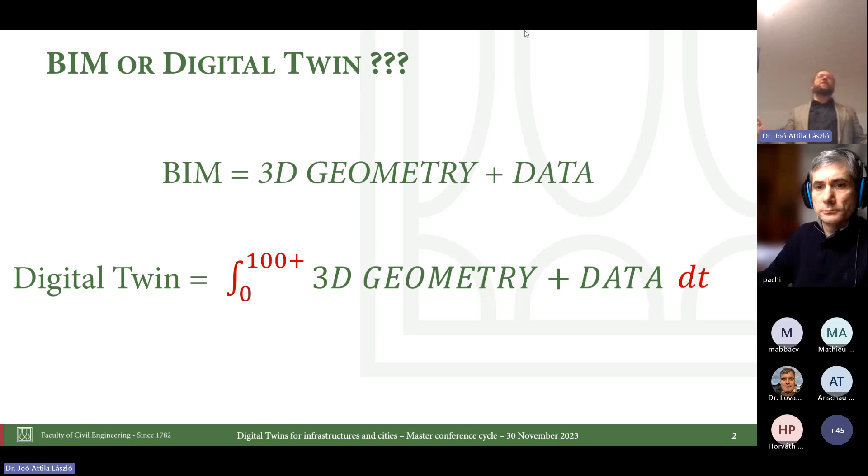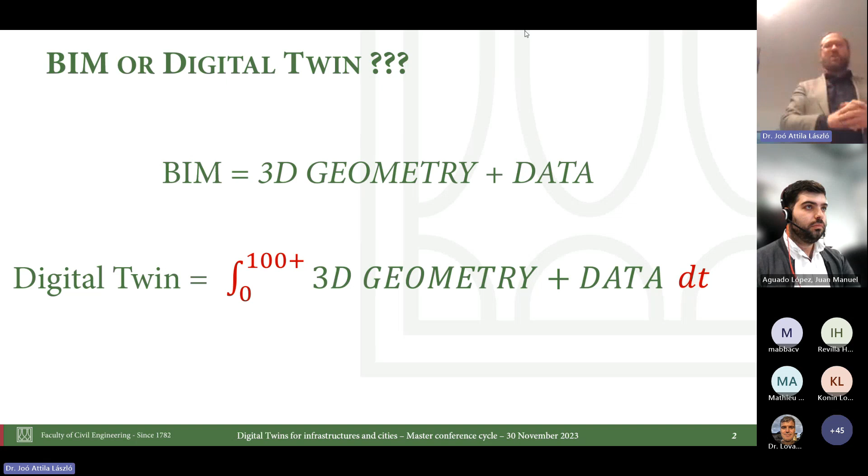There can be several differences. Let's say three. The first one, this digital twin depends on time, right? So we want to store and use any kind of information which corresponds to the structure from the design table to the end of the life cycle. And that's why I made this integration mark and 100 years, because we design bridges for 100 years.

And of course, there are two other specialties. Let's say what kind of geometry we have. It can be different from what was on the design table, because during the erection of a bridge, of a structure, we may change something in the geometry. So what we need is the final geometry, definitely the final one, and what kind of data. And from my point of view, this is basically the most important thing, the most important difference.

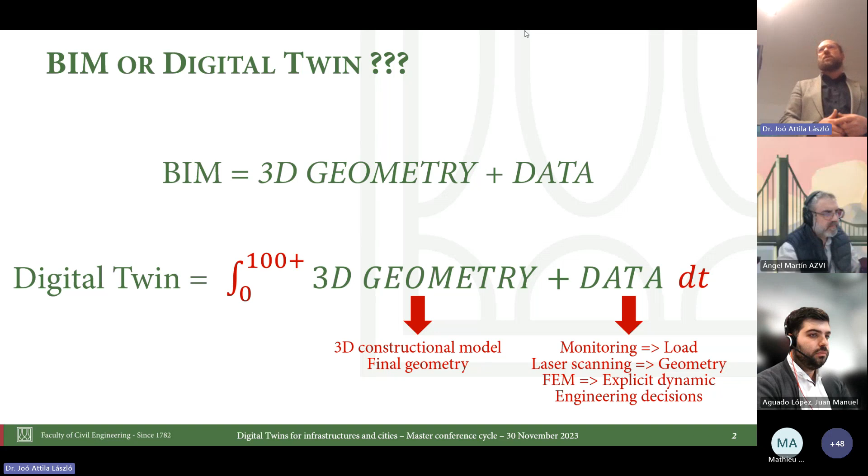The BIM model is a model for just one point in time. Of course, maybe you can take into account the scheduling of the erection and so on. But now I would like to store any kind of structural data. And that would be my message at the end, that we can store in the BIM model some other structural monitoring data. We can store the scanned geometry, and I will show you that we can do special explicit dynamic analysis, and we can use that information later as well.

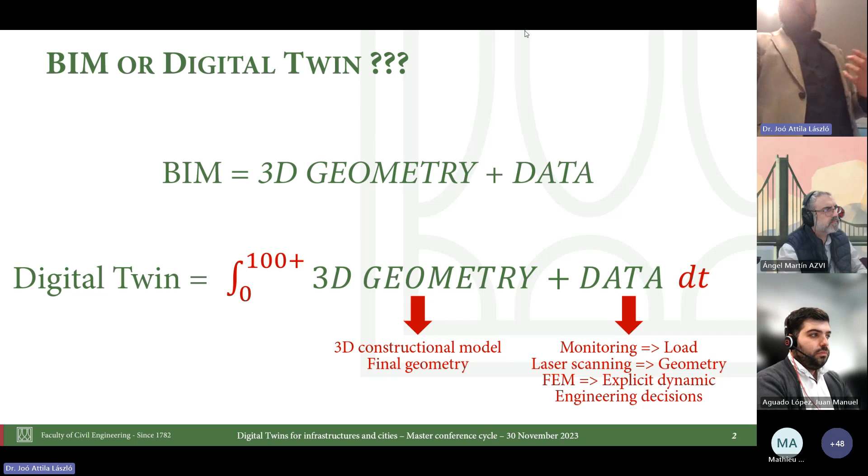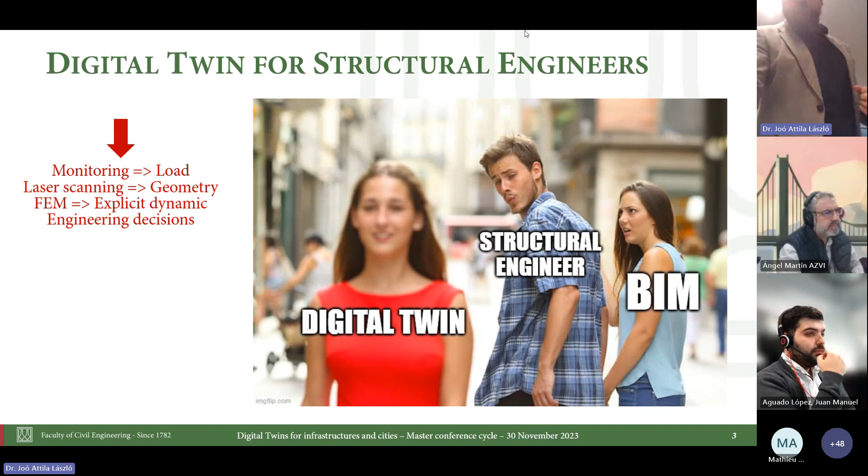So I think that the future for structural engineers is the digital twin. We can have much more engineering information than just the geometry and just the fabrication information. Of course, BIM is part of this digital twin, but I will show you how we can extend it with some information.

So the basic idea can be seen on this slide, that we need the 3D geometry, the 3D model, and it can be several kinds of 3D geometry, because we can have a finite element model, constructional model, and so on. And that will be the base geometry. And we can store any other data we need. And it can be some strain gauges, even temperature, wind speed on a structure, on a bridge, and so on. And we can have a finite element simulation. I show ANSYS, and what I will show during the presentation, all of them are ANSYS simulations. So we can store all kinds of structural information.

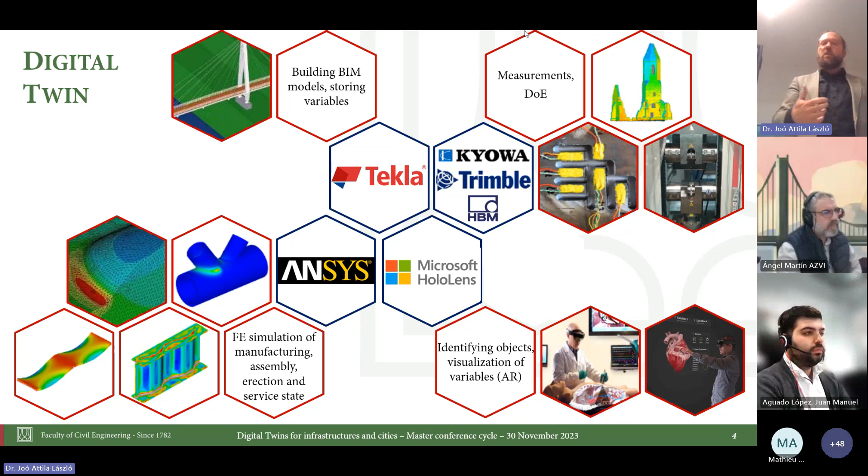And the last part will be how can we share this, and how can we make it easy to see large data, because we have much more data, and we will have much more data than we used to. So if I see the life cycle of a bridge, and the example will be a bridge here, we have different steps until the end of the life of the structure. It starts on a design table, and we can manufacture the thing.

May I ask you to turn on the microphone, please? Just 1 second.

Okay, thank you. So the design table, manufacturing, the assembly erection phase. We used to have in Hungary, I'm sure it's not all countries, proof testing of a bridge, but we have to do it here. And of course, the whole life cycle of the bridge. The basic idea: we will have some real measurements on the bridge, mainly strain gauges, which is most important for us from a structural point of view. We will have finite element models for the different levels.

We collect all that information, because usually we use different software. We use different software for the design, maybe for different finite element models, depending if it's a global model or a local model, for making drawings during the manufacturing process as well, and even during the life cycle. Maybe we have monitoring software as well. So we try to make this idea that we just have one model of the bridge, which will be now a Tekla BIM model, which is the real geometry after the erection. And we try to store and extend somehow the functionality of Tekla Structures.

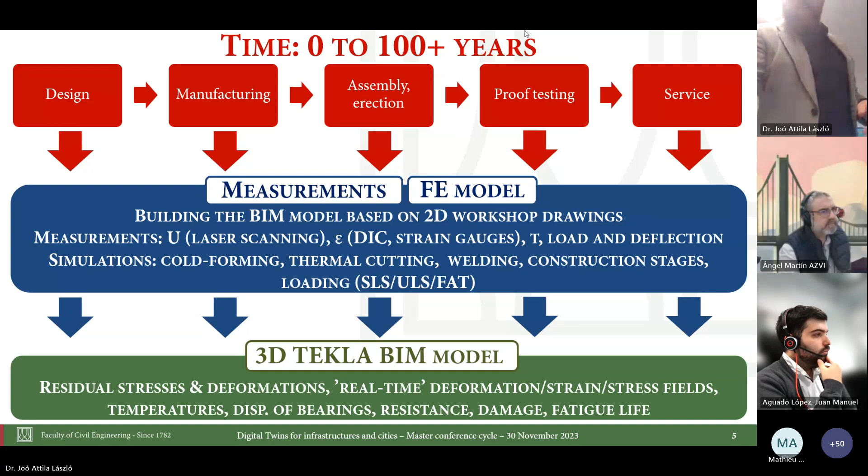So why? I think the construction industry is going through a large, very effective change, compared to, let's say, the car industry or mechanical engineering industry, where I'm sure you know about Industry 4.0. Now we can say that in the construction industry, we are in the stage of Construction 4.0. So we try to use digital technologies all around the different phases of the design, erection, and through the life cycle of a structure. And this information and digital twins can be used in plenty of places. For example, for a bridge, usually we have a maintenance cost, we can have an extreme load. But if we know the real behavior in real time, maybe we can make safer structures, and we can reduce the maintenance cost as well.

And as you heard in the introduction, I'm the head of the Innovation Management and Cooperation Centers. So I try to think on the business development side as well. As we have seen on the previous slide, nowadays we usually have a company for design, a company for the manufacturing, one company for the erection, and somebody will take care of the bridge in its whole life. So they are different companies, and the information flow is not so easy between them. So in my point of view, these innovation technologies, and especially the digital twin, can be a new business opportunity. That's why this name here as well.

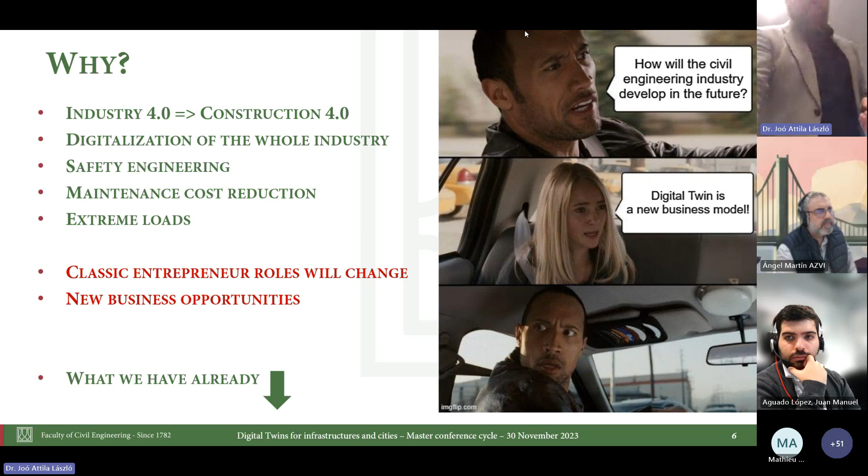So what we have now, I don't want to go into details, but as I mentioned, we have different software, we have different companies, even in the university. I will show you just some examples for these different phases. For example, the design phase.

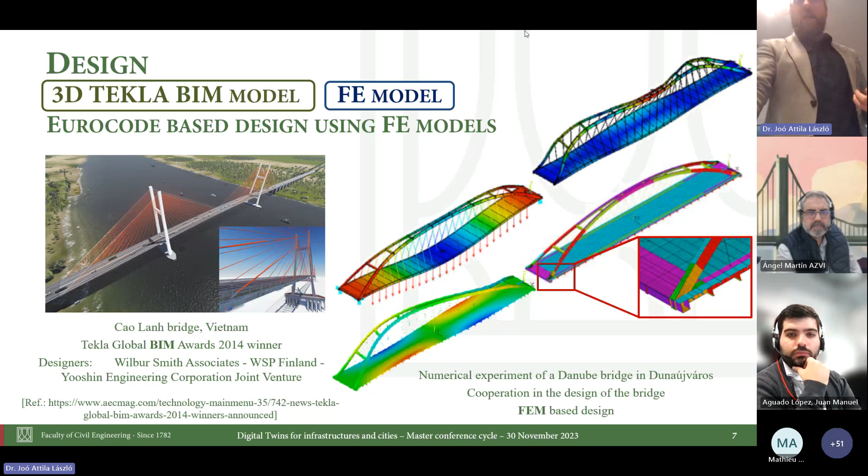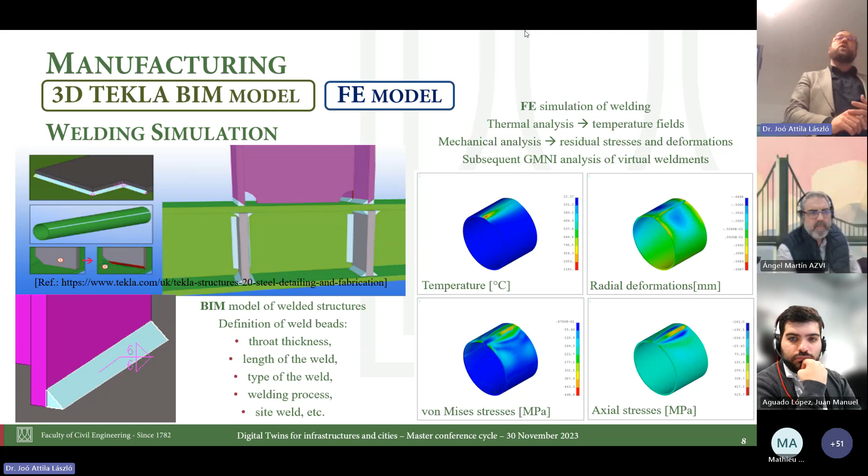Again, I don't want to go into details, but we are using 3D models, maybe a BIM model as well. We are using some kind of finite element models as well for the manufacturing. We can do welding simulation. You can see a video on the right side of the 4 videos here, a very simple welding simulation. So we can get any kind of information from those simulations.

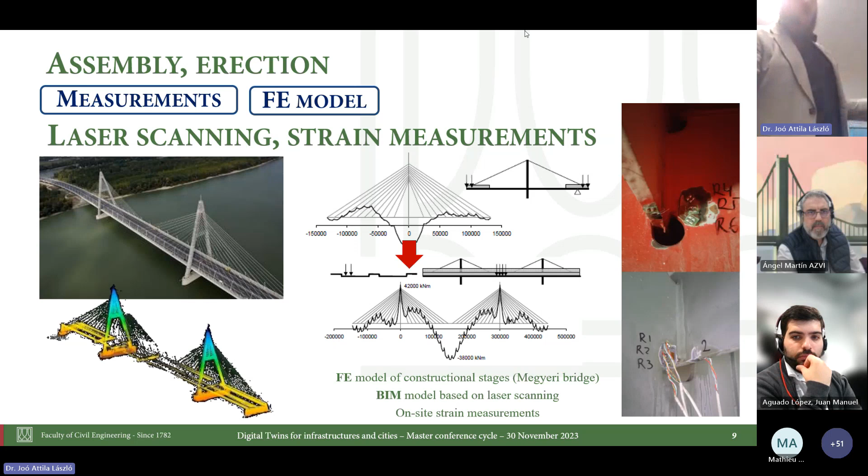During the assembly and erection phases, we can use geometry measurement tools, laser scanning, or we can monitor the behavior of the bridge as well, which is a usual thing, and we used to do it here in Hungary and Budapest as well. We have nice bridges around Budapest.

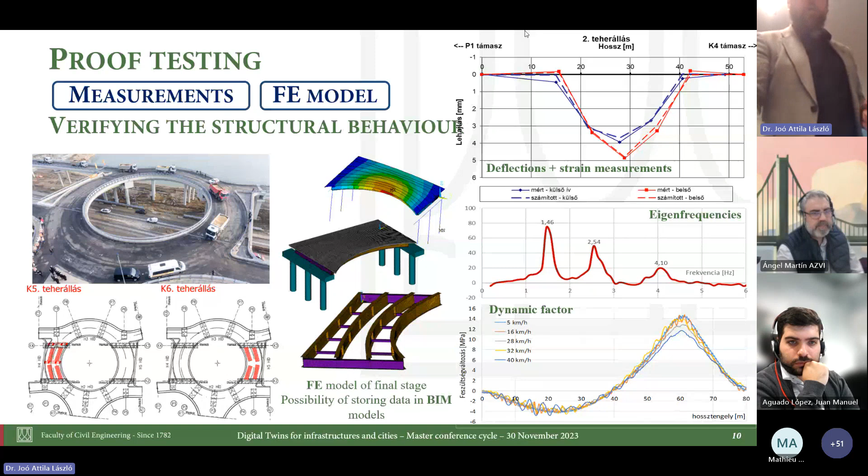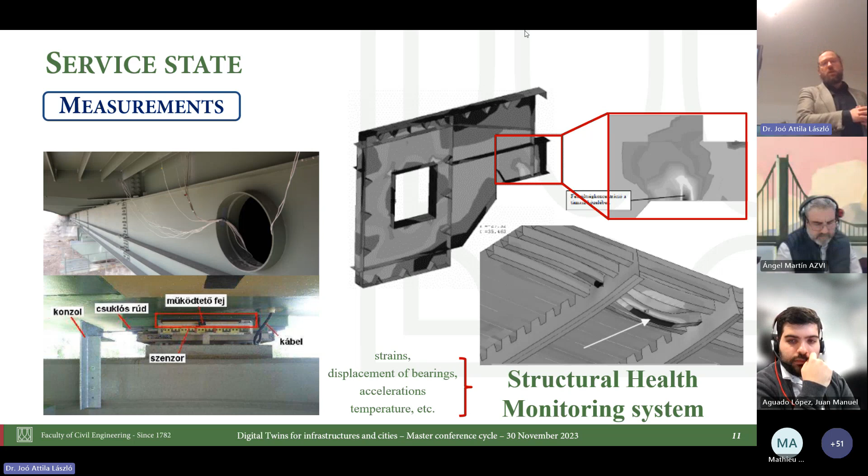It can be one way to try to follow the real behavior of the bridge, but we want to improve that, and that's the digital twin, I think, and we will go further based on that. So as I mentioned, we have all these things actually, but the digital twin can be the one technology which connects each step from the design until the whole life cycle of the bridge.

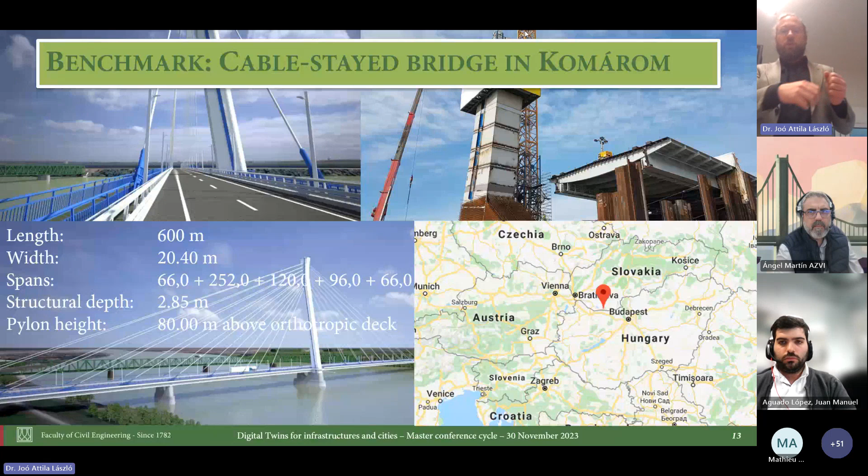So in the last 4 years, we had the chance to have a project, and we were able to follow these steps. Actually, from the very beginning, we had the design data, the design drawings, we had the calculations for designing the bridge, and we were able to follow it until the end of the erection and during the service state as well. So based on the same steps, I would like to show you now the new results we have.

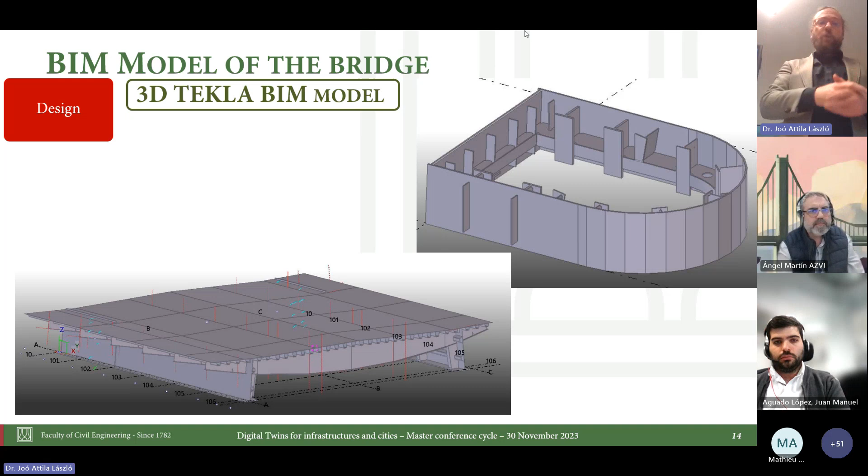And as I mentioned, we should have the final geometry of the bridge. Now it's a Tekla Structures, a 3-dimensional constructional model. Every plate and every weld can be found in the model. Of course, several finite element models were used during the design.

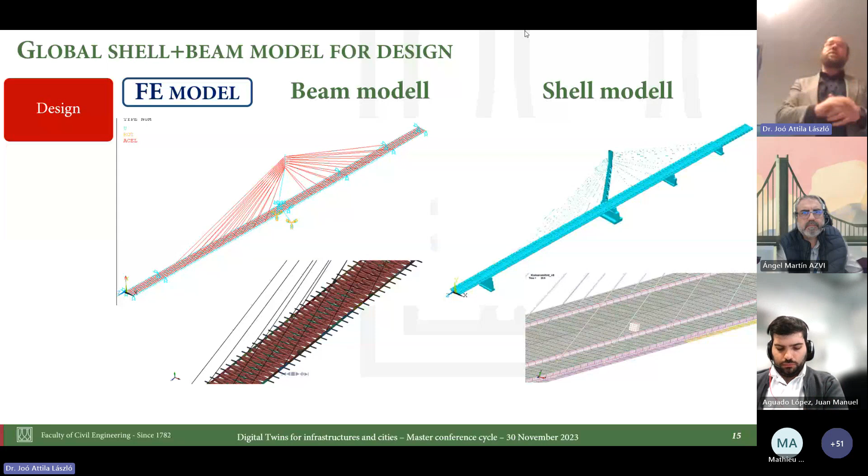It can be a simple beam model with beam elements on the left side; on the right side, maybe a complex shell and beam element model as well, where the deck plate is usually made of shell finite elements, maybe the pylon as well, and maybe the cables are link or beam elements. These models were used for the design, but they can be used later with slight changes. I will explain it later during the presentation.

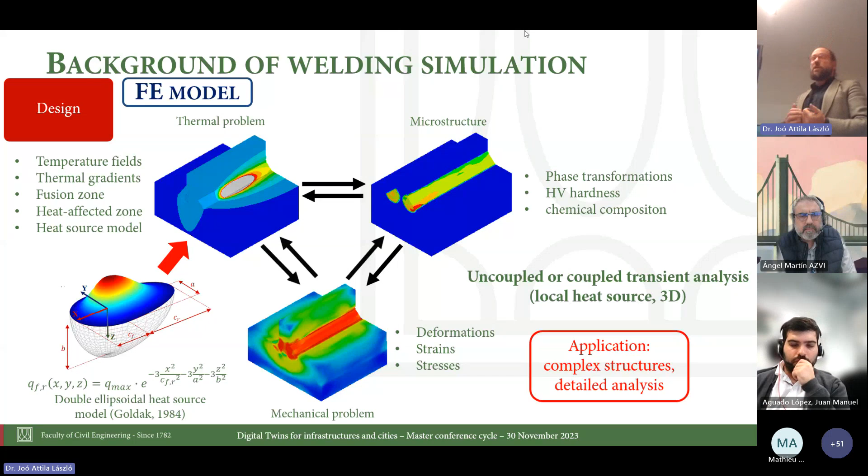We had the chance to be part of the manufacturing steps. So I just want to show you some details of the welding simulation, because we did some measurements on site, but for the welding preparation, defining the welding steps and choosing the correct methodology for welding such a large structure, the welding simulation can be very useful. It can be a complex analysis. It's a thermodynamic analysis where you can see the heat flow, and then we can do a mechanical analysis, and we can define the deformations, the strains, and the residual stresses as well.

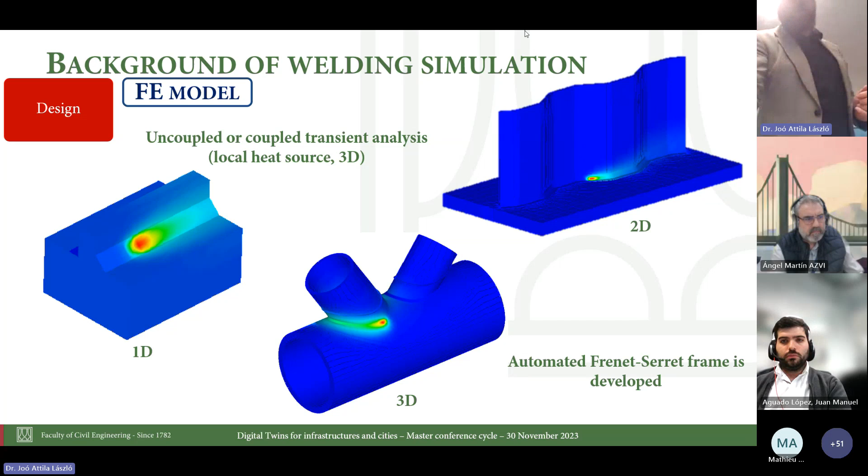I'll just show you some examples. How can we do it with volume finite elements, and even during the project, we developed a simplified welding simulation as well, because sometimes it can be very time-consuming and computationally expensive to do this kind of simulation. But we can do it, and as I mentioned, we were able to measure during the fabrication process as well.

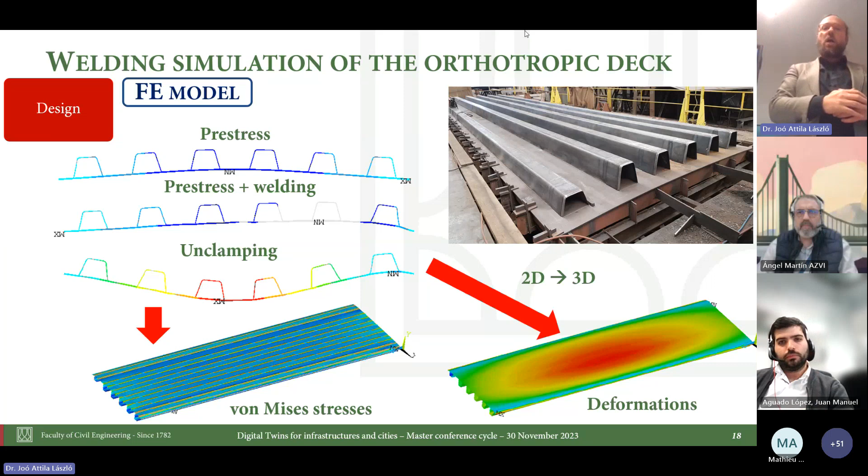And as I mentioned, for the digital twin and the real-time digital twin, it can be a huge step that we know all the information from the fabrication. So not just only the time when the erection is finished and we start the life cycle of the bridge, but from the manufacturing process as well. So let's go to the next phase, the manufacturing.

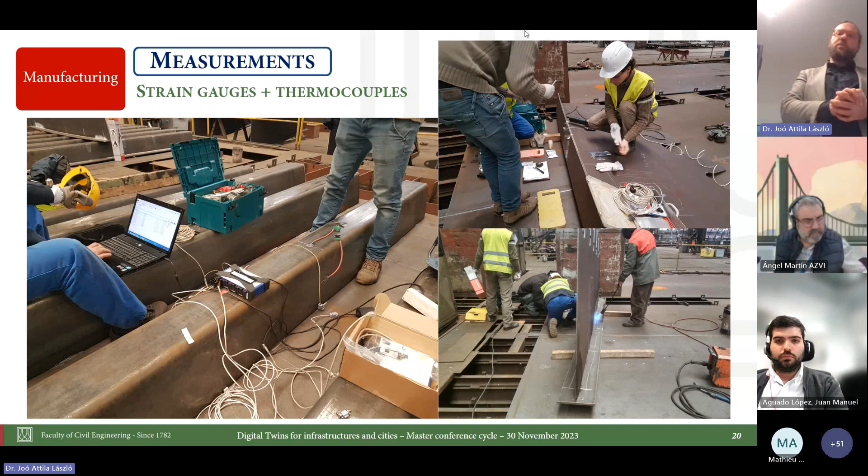On one you can see how we measure the strains on this orthotropic deck. And I have tons of pictures and reports as well. We measure different parts of the bridge as well. You can see a cross girder on the bottom right side as well. So we did plenty of strain and residual stress measurement as well.

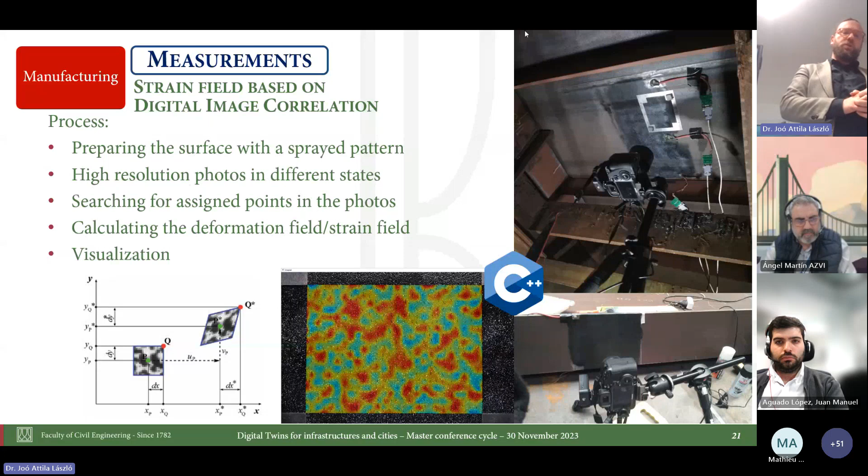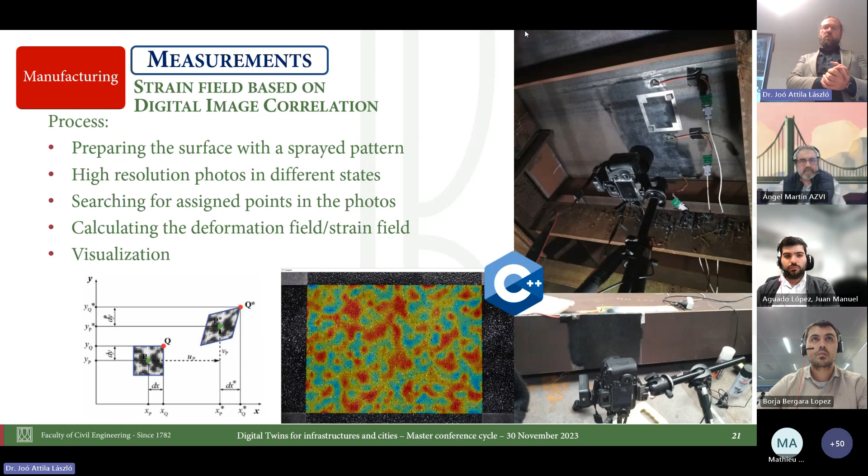We also tried a new technology which is in the research phase right now. We try to measure the strains with a high resolution camera. We paint the steel structures with very small dots, and based on the movement of those dots, we can measure the strains with a very high definition camera, and it's a very useful technology as well.

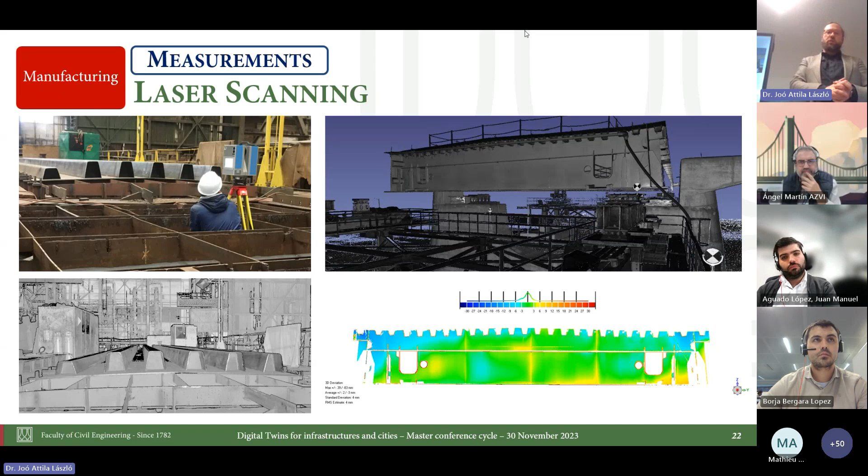And as I mentioned, we not just measure the stresses by strain gauges, but we scanned the geometry as well. You can see in the manufacturing hall how we measure the orthotropic deck and other parts. And these results can be used later, because we can have a deviation map. So we can calculate the difference from the geometry we have in Tekla Structures.

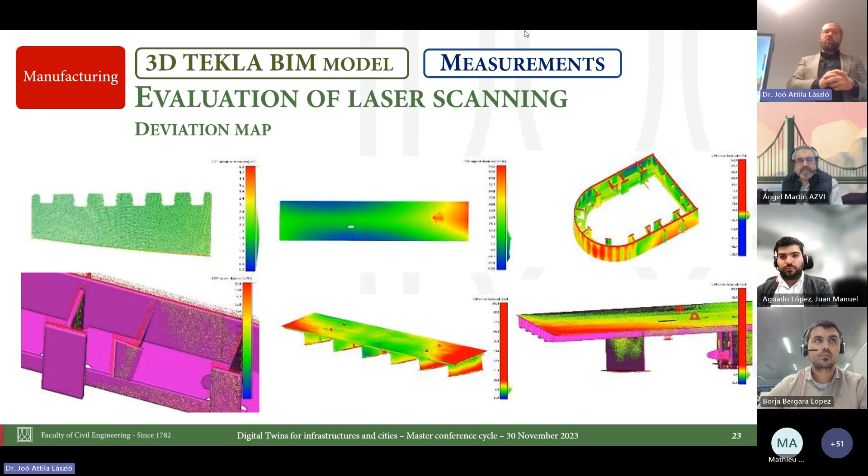We have the exact geometry we would like to achieve, and we can scan every point, every millimeter or so, of the geometry, which gives us much more information than we used to have, because usually in the classic technology, for example for the deck plate, you just measure the corners, the edges, the cross girder main points. So you used to have several points of information, but with this kind of technology, which is close to the 3D technology that we want to use in the digital twin, we can have much more valuable information. We can do this, of course, during the assembly and the erection phases as well.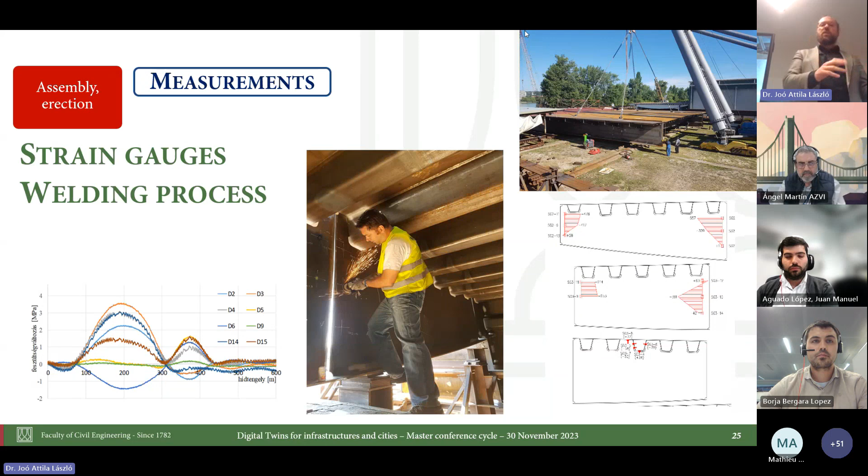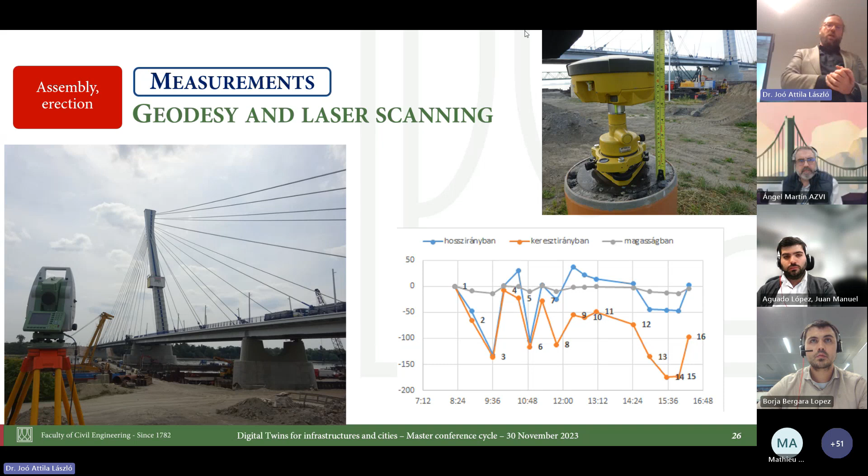For this bridge, there were smaller assemblies prepared in different countries, Slovakia, Czech Republic, and Poland as well. And some of them, the deck plate parts, came to Hungary, and there was a pre-assembly phase here in Budapest, and then the whole deck plate went to the site. Because we have some extra welding during this pre-assembly phase and during the erection phase, we can define the residual stresses as well. And of course, we can measure the geometry with the same technology as we used in the industrial hall. We can do it inside as well to check the geometry of the bridge.

So we are going closer to the service state, but before the service, we have to do the proof testing. You can see a picture of this site testing on the top right corner. The vehicles, of course, are loaded, and we calculate the deformation by our own finite element model, the geometry and the deflection of the bridge, and we do measurement as well with geodesic technology.

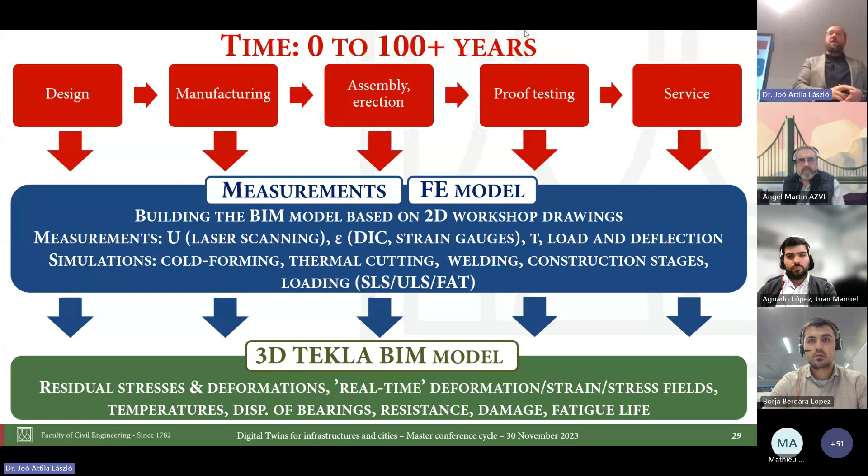And on the bottom right graph, you can see two sides of the bridge in two lanes we measured, and you can see a very good agreement. Actually, there are two red lines and two blue lines, right? They are so close to each other that there is no problem with the bridge. So we measured what was the calculated shape of the bridge. And now I think we are coming to the most interesting part.

And as I mentioned, based on the sensor data, there is an independent research field about structural health monitoring. If you want to use SHM, then you want to decide the behavior of the bridge based on several data. Of course, you have to install a monitoring system, but I think the main problem with this kind of SHM technology is you will have information just from specific points of the structure. So you won't see the whole picture.

I think that's why the real-time digital twin can be much more important for structural engineers. Because as soon as we have a monitoring system, maybe if we place the strain gauges in a special way, I'll show you on the next slide, then we will be able to define the load. And actually, if we want to calculate the real behavior of the bridge, we have to know what's the load, the vehicle axle load which is going through the bridge. So I will show you how we can calculate it, how we can define the load which is going through every day, every minute on the bridge.

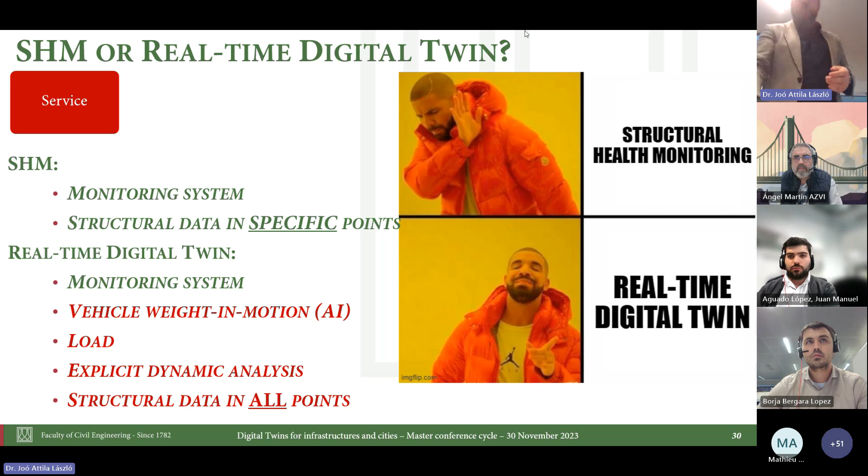After that, as soon as we have this information, we can do an explicit dynamic, real-time dynamic analysis. We just have to know what's the exact load there. And as soon as we have this simulation, we will know all the structural data we need in all points of the structure, not just those nodes where I have sensors, strain gauges, accelerometers and so on, but in all the nodes of the structure. So that's why I say the real-time digital twin can be much more useful for structural engineers.

Because as I started for the real-time digital twin, I would like to have just one 3D model, and I would like to store all kinds of information, like explicit dynamic analysis information, in that 3D BIM model as well. So we have to export that data, and that will be the output of this explicit dynamic analysis, and we will use Tekla to show that information as well.

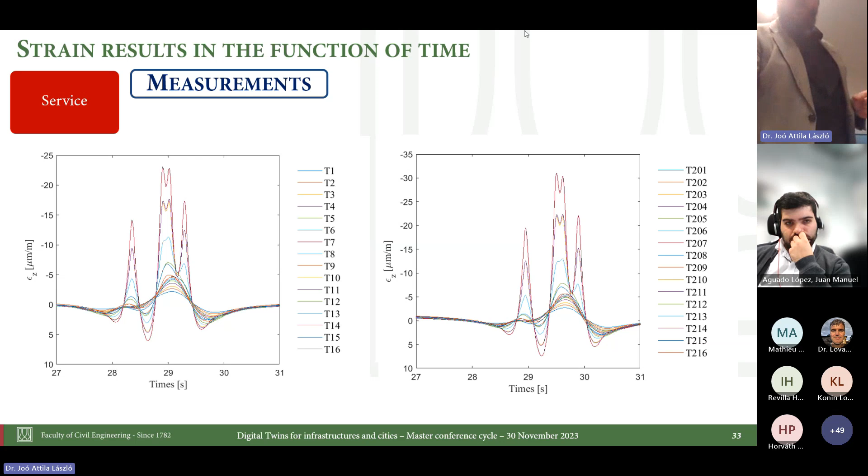We have to define this kind of stress concentration. You can see there stress changes during the time. Of course, we have to eliminate the noise. Based on the two sections, we are able to define the speed, the number of axles, the sum weight, the total weight of the vehicle, and after that we will have the axle weight.

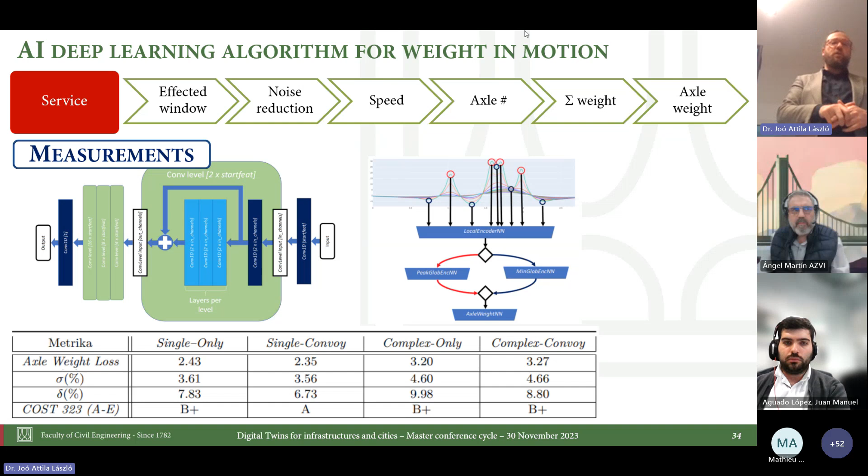As I mentioned, we have the big data here. There's no exact solution, but a deep learning algorithm can be used, and it's a very effective way. Because the system, I think it's kind of cheap compared to other structures, but we have much more additional value in it, because we have to develop this artificial intelligence, and we can say the accuracy is much better than what's available nowadays. So who is afraid of the AI? Based on this, actually myself, we can use it in plenty of ways.

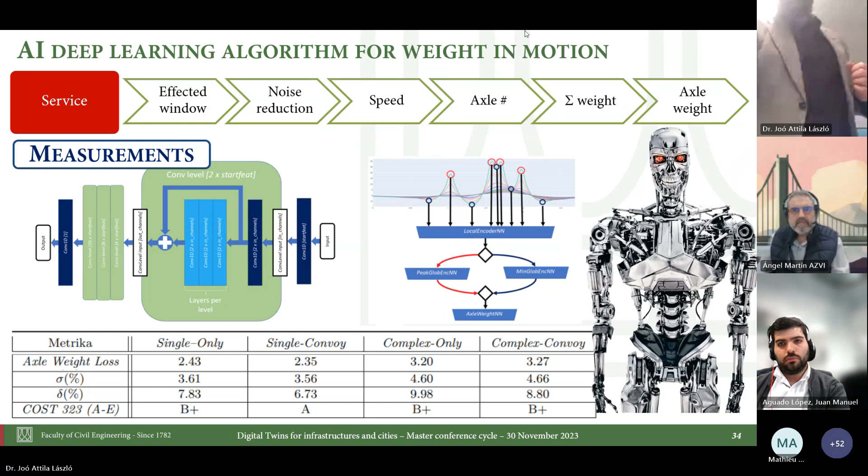And in the structural engineering industry and construction industry, this can also be a very useful thing in some cases.

As soon as we calculated and defined the axle loads going through the bridge, we can run an explicit dynamic analysis. You'll see a video showing slight changes in the displacement.

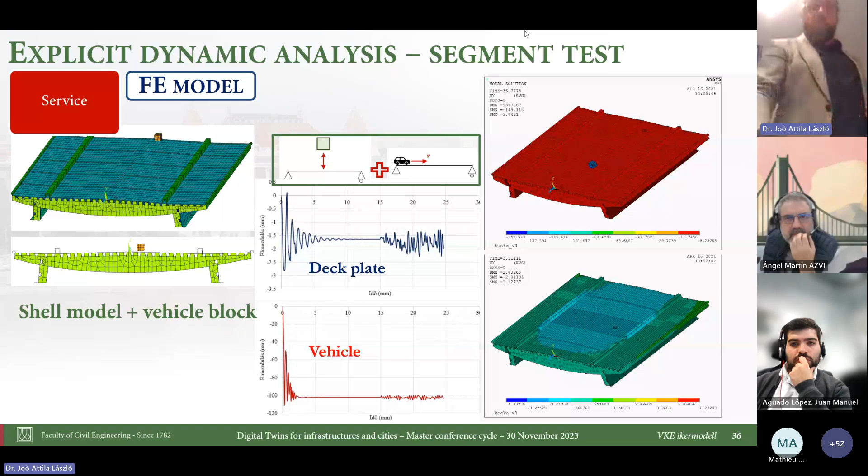We made some tests on small deck plate elements, looking at how we place the vehicle and the interaction between them. You can see the time-dependent displacement of the deck plate and the vehicle. It's a real dynamic system - the vehicle goes through and changes the stress fields in the deck plate. Of course, we can do this for the whole bridge as well.

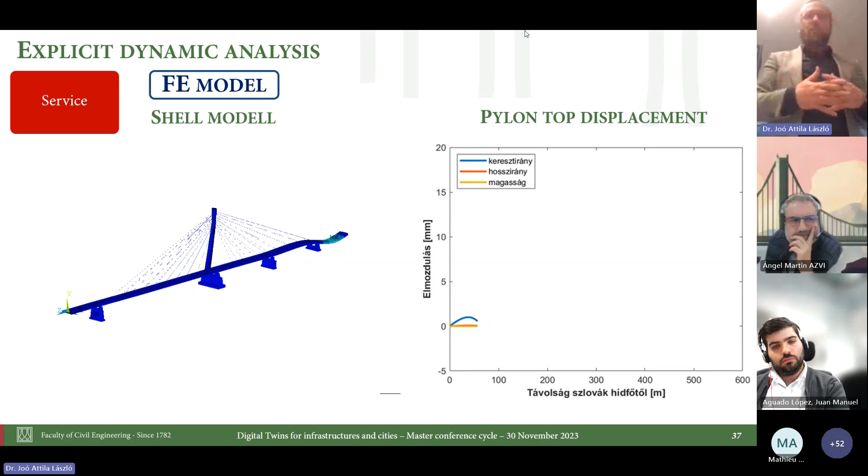We had some results on the shell model, and now we are developing a beam model, which will be less time consuming to run this kind of explicit dynamic analysis, while still being able to calculate all kinds of structural information based on it.

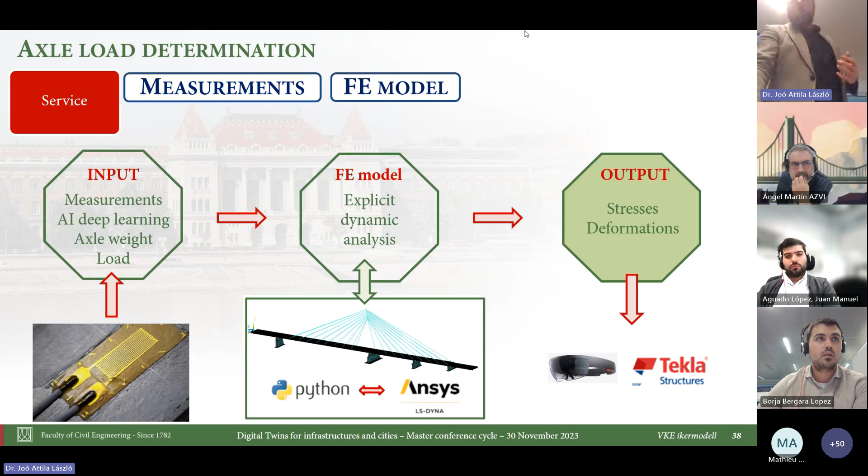At the end, if we have this data, we have to show it somehow. As I mentioned, BIM structural software is prepared to handle manufacturing information, drawings, lists, and so on. So we have to develop our own application which can store this kind of data - sensor data, laser scan geometry, or finite element simulation - and all of this depends on time as well. So you can see what kind of data we can have.

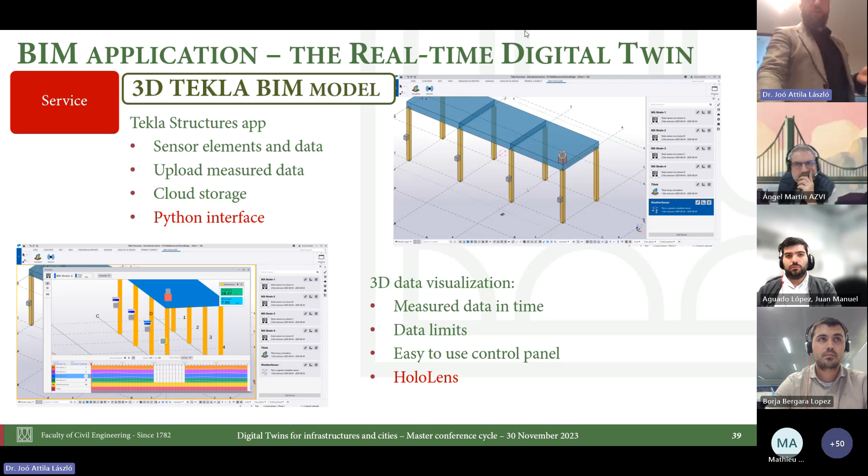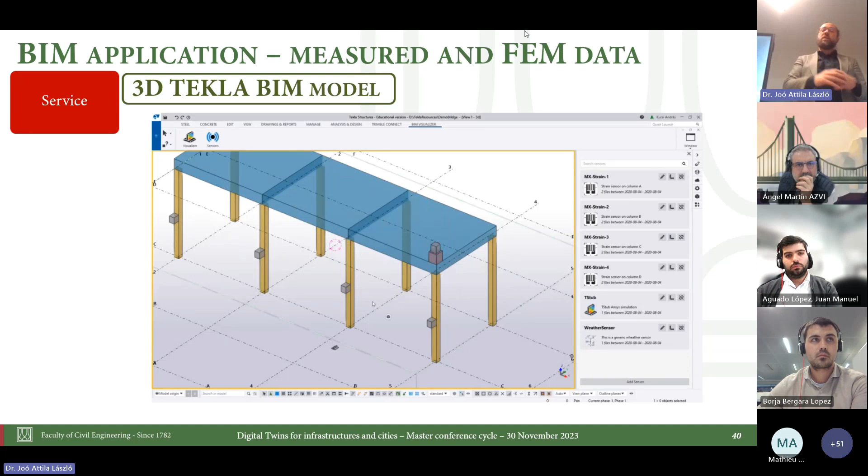I'll go to the next slide because I have a video I want to show. It works actually in the Tekla app. This is a simple structural example. We can have objects, define them as sensors, and store the sensor data. Of course, we can use timestamp data for these and show the results.

We have a tool down here, you can see the colorful stripes - those are the different sensor data over time. It can also be information from the manufacturing process.

For example, now you'll see a weld simulation. It was done in ANSYS, the finite element software, and now it's implemented in Tekla, but we can add a timestamp. So from the start of the manufacturing process, we can have information and store it in a BIM model. If we have a sensor, we can do the same.

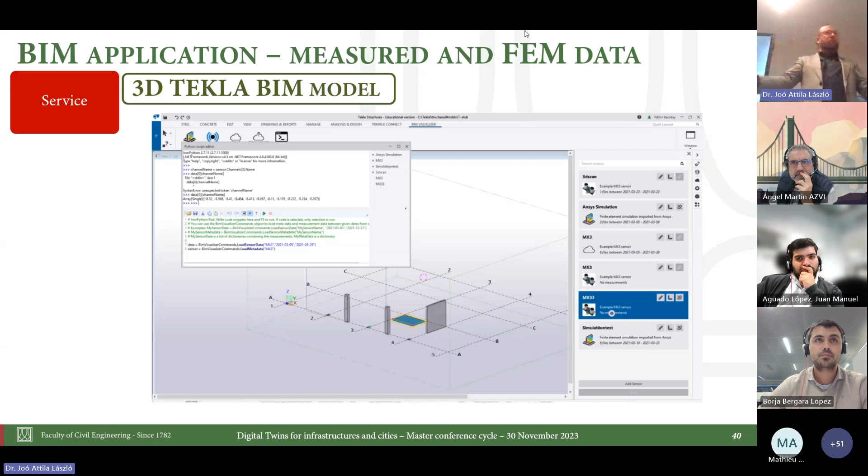And one extra tool - of course, we want to use this information later. So we have a Python interface, because engineers may need this information, and that will be the future, I think. So we developed this interface as well.

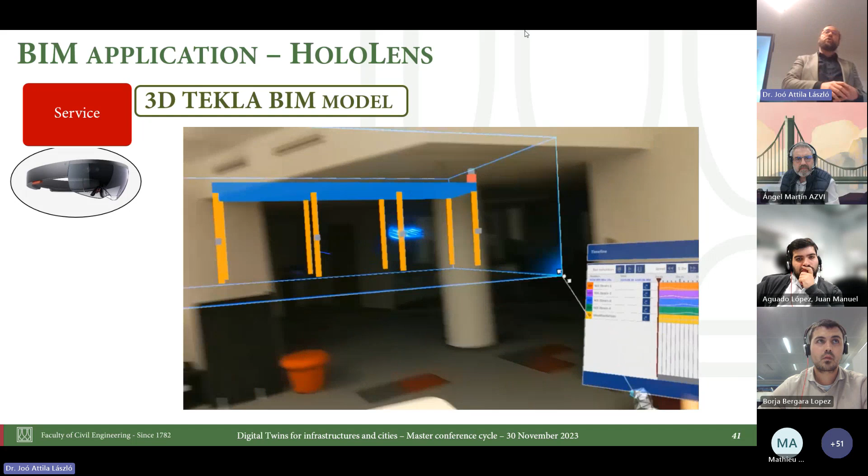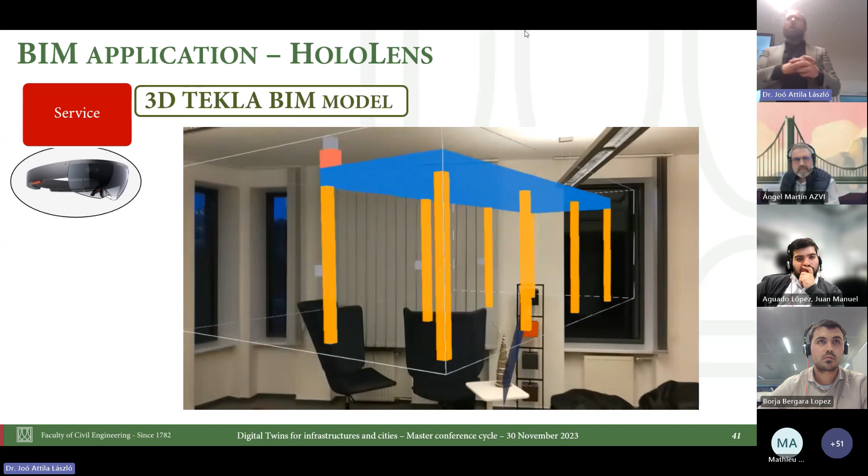And I'll show you the not-so-far future. It's a HoloLens application, because as soon as we have the Tekla 3D model there, we can actually use AR, augmented reality, to show the same information.

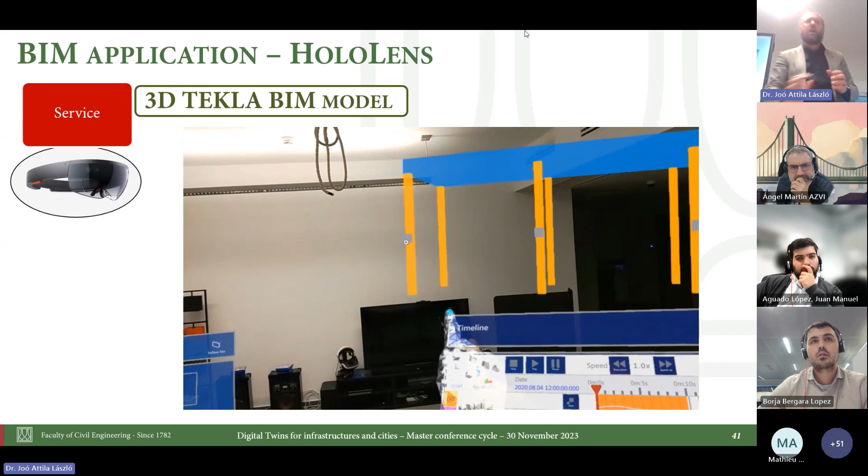You can see the timeline here, and you can see the same sensor data as well, and you can interact with your hand.

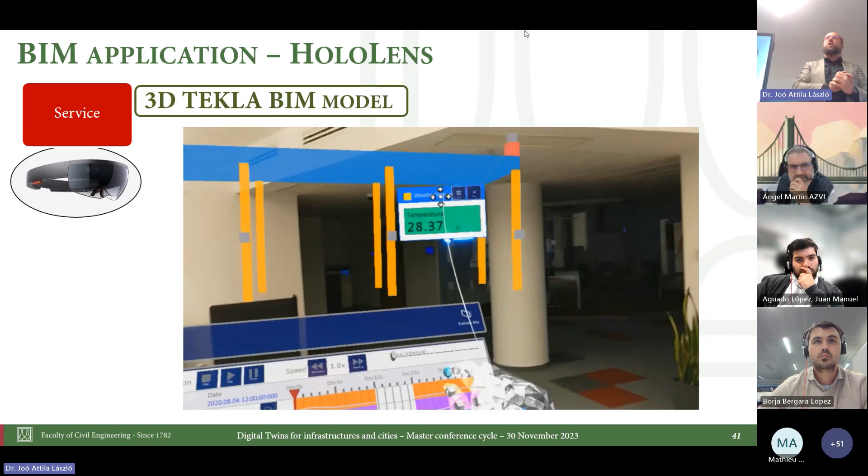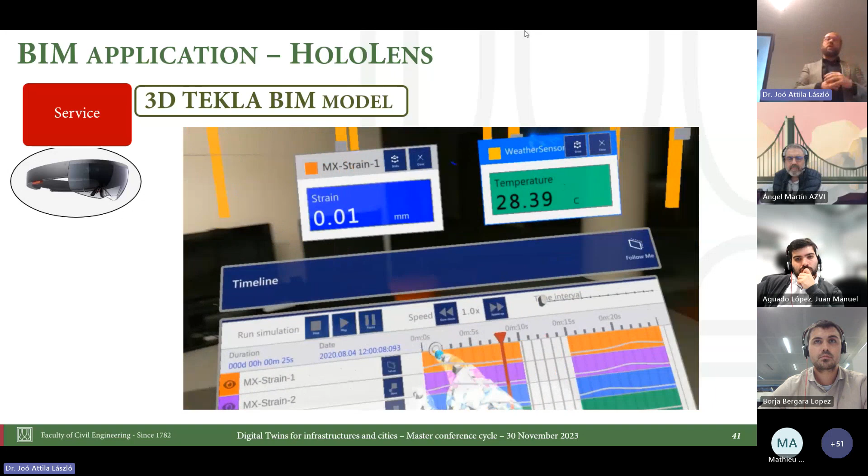I think in the future you'll be able to go outside the site to visit the bridge. Our vision is that if a car is going through the bridge, we have sensors measuring the strains, AI calculates the load, the explicit dynamic analysis calculates the internal forces, stresses and deflection of the bridge, and this is exported to Tekla, so you'll be able to see the whole structural information of the bridge through a HoloLens.

Of course, we are not there yet, but I think we are close, and getting closer and closer.

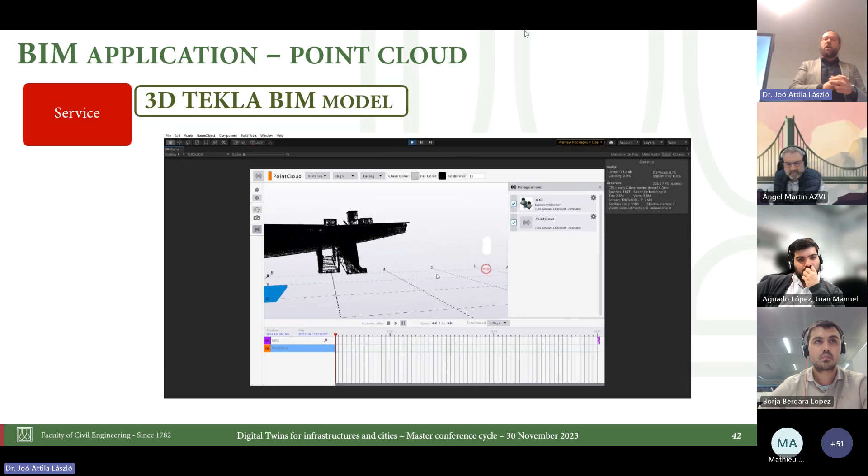This is just one example showing that we can implement scanned information, the point cloud, into the Tekla BIM model as well. So as I mentioned, we are able to import all kinds of structural information into one model.

So from a structural engineering point of view, what is the digital twin? As I started with the comparison between BIM and the digital twin - but actually it's not really a comparison, because BIM is somehow part of it, as it can be the base geometry. But definitely, from a structural point of view, if you want real-time information about the bridge, we need a monitoring system, extra measurements maybe, and an explicit dynamic analysis as well.

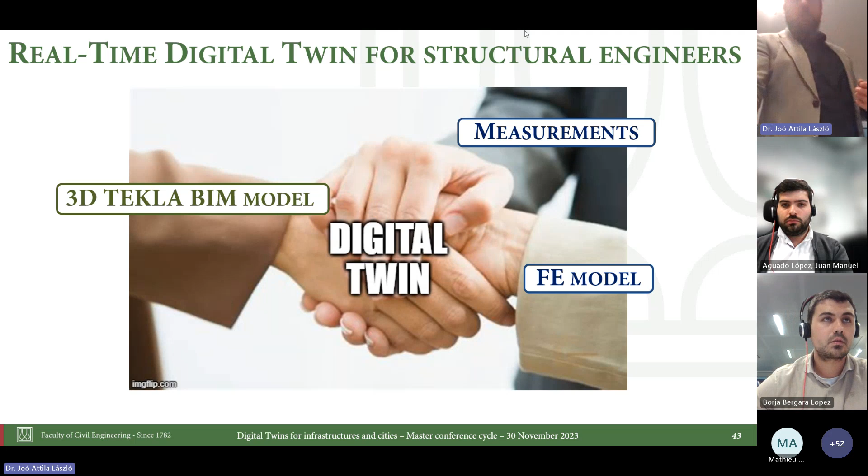So what should we do now? I think I'm close to the end of the presentation, because the question is what we do if we have this kind of real-time digital twin of the bridge.

I think the opportunities are opening up just right now, and maybe the young generation will be the key for this. From an engineering point of view, we have some experience, but this kind of digital thing, big data and AI can be very useful information, and it will define the future of structural engineering. Just one example - as I mentioned, we have the Python interface.

We can get the stress concentration from one field. And if you want to calculate the fatigue lifetime of structural details, you have specific loads in the code, in the standard, which defines how you have to define this kind of criteria for the bridge. And of course, the real load on the bridge is different, it's not the same. So you will be able to extend, because usually the codes are on the safe side. But if you know the real axle load and the real stress distribution of the bridge, maybe you can extend the lifetime.

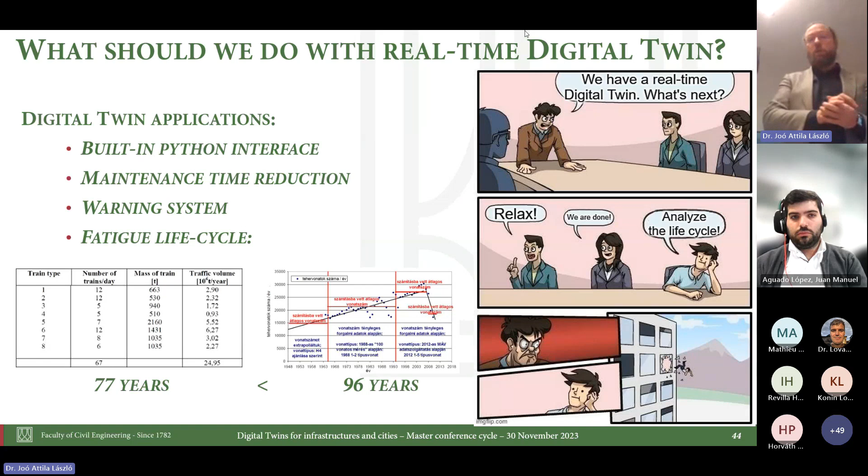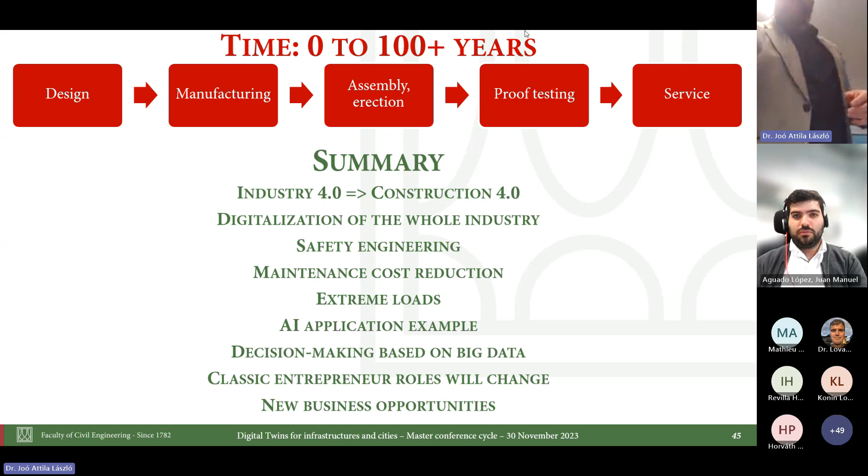So I hope you are not lost now somehow in the structural engineering point of view. Digital twins try to show you the construction 4.0 possibilities, how the whole construction industry, even for structural engineers, will change, and how can we maybe develop new business models for this kind of model. So if you are not lost, you don't have to use this kind of virtual reality to be able to find a structural engineer, real-time digital twin model. So thank you for your attention.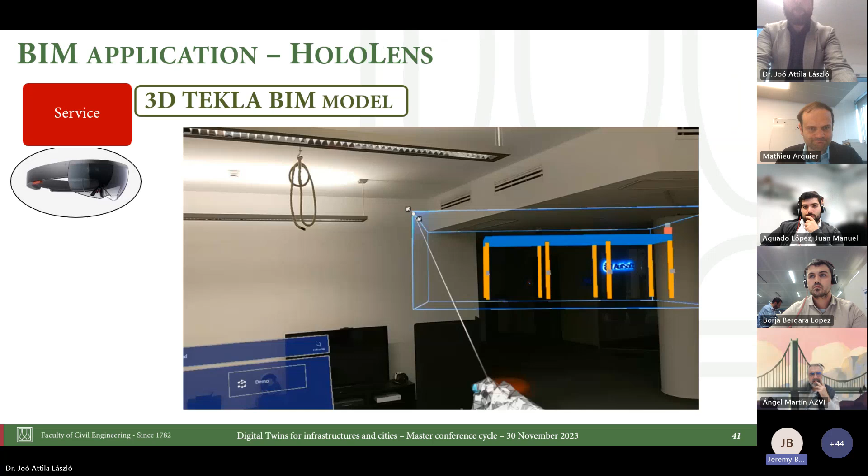So the first one is a bit technical, let's say. So you're doing dynamic analysis. Often when we have dynamic behavior, we have some parameters which are not very well known, which are related to dissipation processes, etc., that would impact the damping of the bridge. So in your talk, I assume that you have identified these parameters, but given that you have many ways of monitoring the behavior of the bridge, do you also plan to improve this aspect of modeling damping and dissipation?

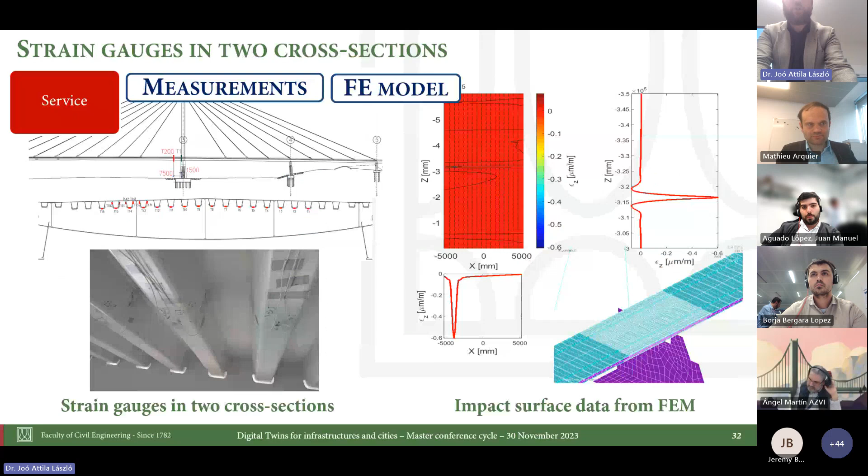Okay, thank you. And the other question is if you can comment a little bit on the difficulty of having all these different numerical tools communicating with each other, passing and exchanging information, to make a consistent numerical tool chain. Is it the piece that takes most of the time in developing a digital twin? And in that case, what skills must future engineers have and develop to make this technology more available in the future?